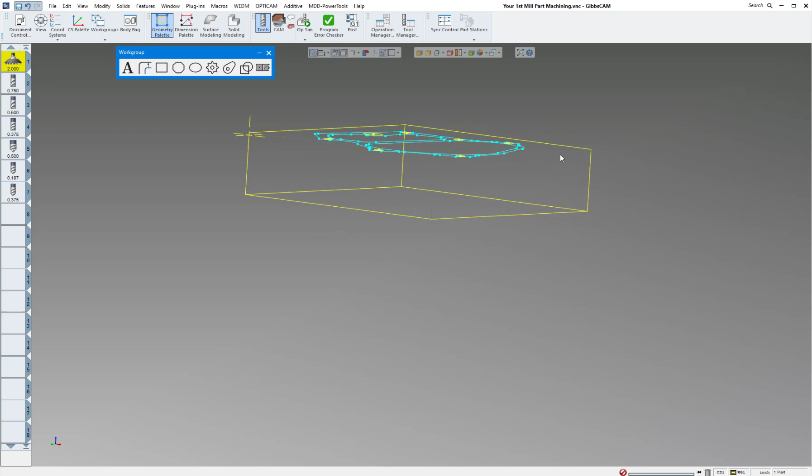Here's our part that we drew on the previous video. You can see everything is at top Z0, and the last thing we did last time was move our origin over to the top left corner, as you can see.

Okay, so now we need to machine it. I want to pocket all this material out before we do some of the inside. We just turn off the show stock and origin there.

So we need to make what they call an air wall, because we're going to use high-speed volume mill to cut that. I'm going to bring up my geometry palette right here, and click on shape and square or box.

We know our stock size from before was 4 3/4 by 4 3/4, because we moved our origin to the top left corner. So I'm going to type in 4 3/4 and 4 3/4.

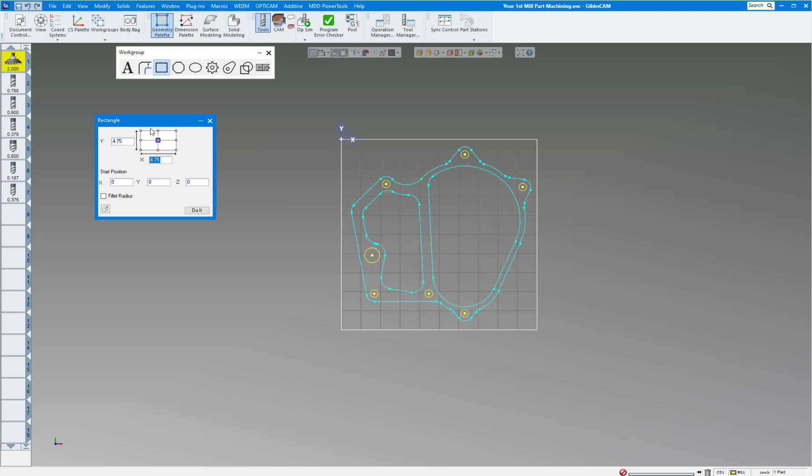Now make sure you pick where you have the origin. You don't want to pick here, because this is what you'll end up with, which you don't want. So make sure you tell it where the origin is, in the top left corner. Click do it, and you have a box the same size as your stock.

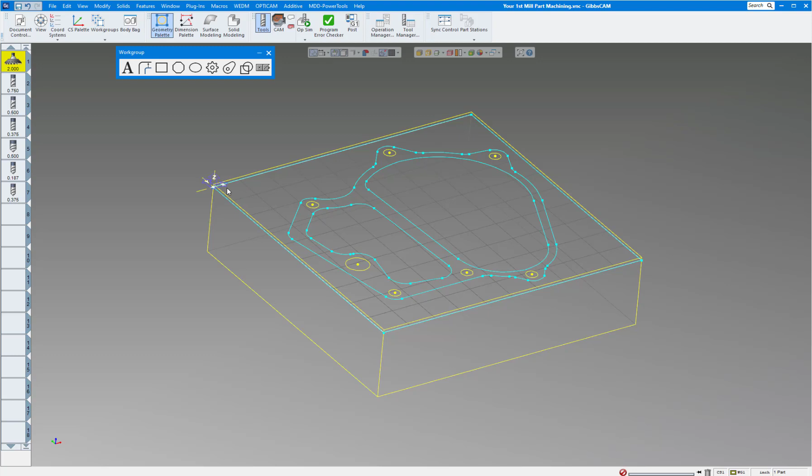So we need to allow Gibbs to bring the end mill past this stock. If we leave it as a wall like it is now, the end mill will stop at the edges and the corners, so it'll never clean this out. So we have to tell Gibbs that we can go outside this stock here to clean all this up.

I'm going to just double click on the shape, and go up to modify and click on toggle wall air. When you do that, your geometry will be red, telling Gibbs that it can go outside the wall as needed in order to clean this up.

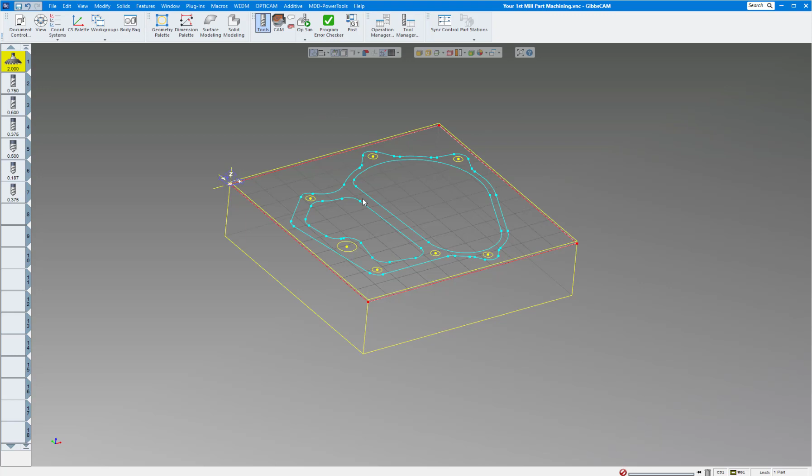So now we need to pick our tools. I'm going to go through each one of these tools, so you can stop the video if you like and take pictures of it so you can create the tools.

Here's my first tool, face mill. You can see everything I have filled out there, and I also call it face mill in the comments. The reason I do that is you can hover your mouse over here and it'll bring up the comments for each of the tools. So that was my first one.

Now the second one is 3/4 inch rough end mill. You can see the values there. Tool holder, call it. Next one, 1/2 inch rough end mill, basically the same, call it.

Next is a 3/8 end mill, because remember we have to go around the outside of this, and this is a 190 fillet, which means we have to use a 3/8 or smaller end mill to finish. We could use anything we want to rough it, but to finish it, if we want to be to print, we have to be about a 3/8 end mill.

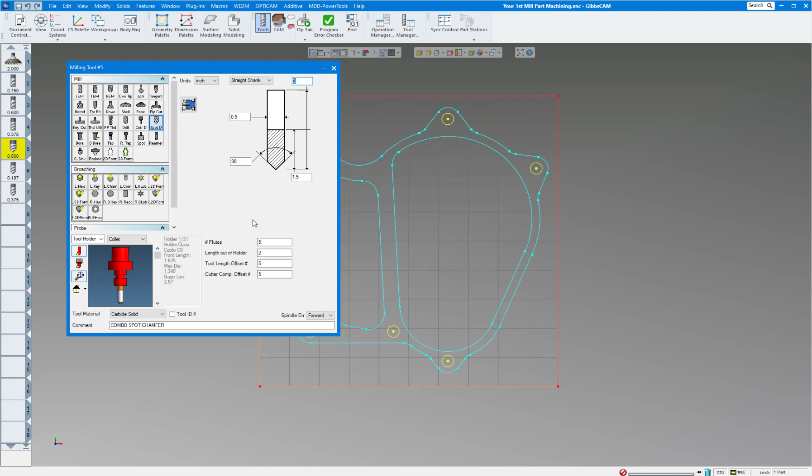Next tool is going to be a spot drill. Nowadays there are combination spot drills, chamfer tools, so that's what I call this, and that's what it's going to be. It's a 90-degree angle, which means it'll put a 45-degree chamfer around the part, with multiple flutes.

And this one is going to be a 3/16 drill, or 187. Notice with the new version 14 you have a drop-down menu that you can use numbered drills or letter drills now, without having to look at the chart.

We're not running in millimeters, that'd be much easier. Okay, and our last tool, 3/8 drill.

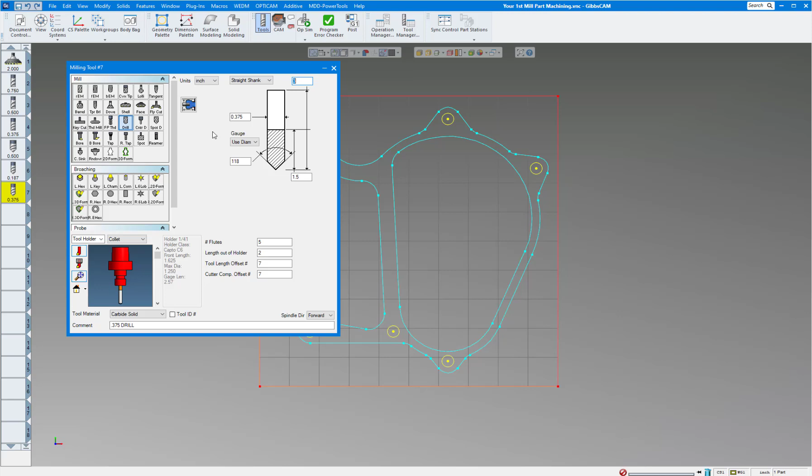So hopefully everyone has a screenshot of that.

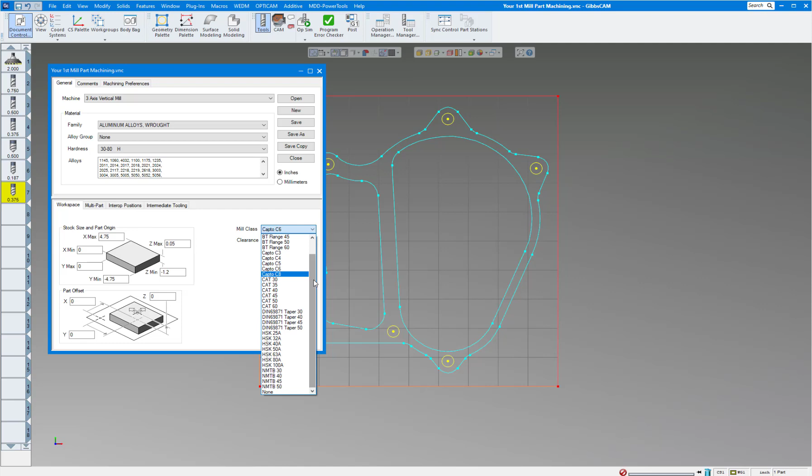So as in the last, we're going to leave 50 thou of stock, which would mean it's a -1.2 overall thickness, because our part's 1 inch thick, and I have a 200 thou clearance. Of course, this needs to be a Cat 40.

Okay, so now we're ready to start machining it. I'm going to bring up my cam palette, just click on a blank screen there. So the first thing I'm going to do is face mill it off. I'm going to bring up a face mill, so this is a roughing process here, right here, roughing.

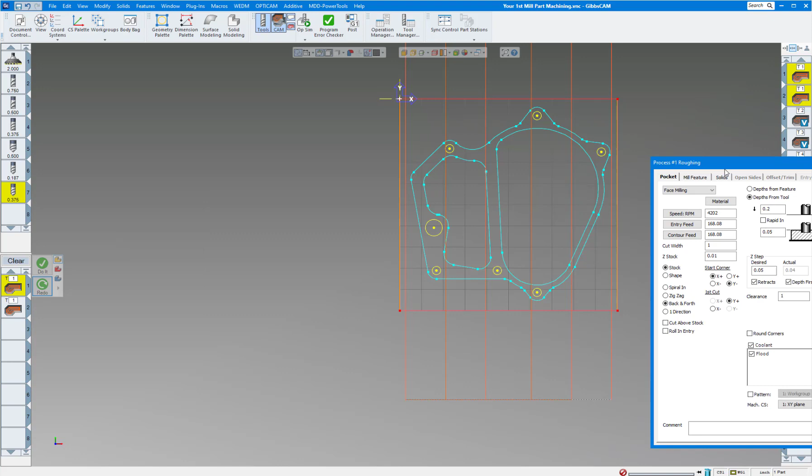And when you do that, it's going to ask you, if you pick roughing, what tool you would like to use. Or you can do it the old way and drag a tool down on top of there. So either way will work. So I'm going to do multiple processes here. So the first process, I'm going to click on face milling.

You can see you have offset, zigzag, offset, cleanup, and face mill. So we're going to choose face mill. I'm rapiding to 200 thou above our part. Remember, there's 50 thou of stock left on the face, and I'm going to machine it down to Z0.

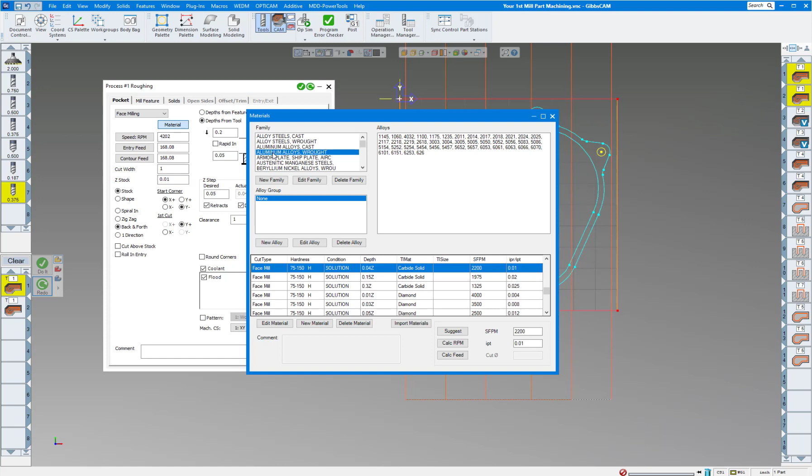Now on here, I'm going to actually leave 10 thou stock on the Z, cut width about 1 inch, and you can either update your speeds and feeds with the material you're cutting, or let Gibbs figure that out by the material you chose here. You can always edit this database to what you like.

And I can do it either by stock or by shape. If you click shape, then it wants you to click on a shape to cut. We're just going to do stock, and it'll clean up the rest of this face here.

Now I always think about where it's going to throw the chips on the first cut. So if you have it going from, say, the left side forward, it's going to throw these chips right at you, right through the door, as you're the operator. So if you have the door open by chance, then that wouldn't be good. So we want to keep the chips thrown to the back. So you can choose the corner you want and the first move you'd like to make.

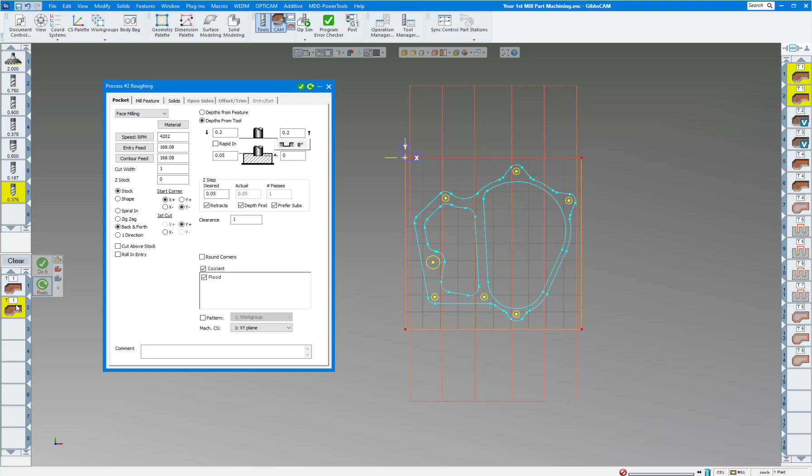Now the clearance is how far do you want the face mill or cutter to move off your part before it switches over to go the other direction. And I just chose 1 inch there. So everything looks good there. Now the second process, basically the same thing, but I'm not leaving any stock here. So about the same thing.

If I click on redo, or do it in your case if you're starting out with new, this is the toolpath you're going to get there. Now we could either render now or wait till we're done, but sometimes I like to render in between. So if you bring up your Operation Sim, don't click on Machine Sim unless you have a Machine Sim to go with it. Click on Op Sim. So if you click on Op Sim, rewind and play.

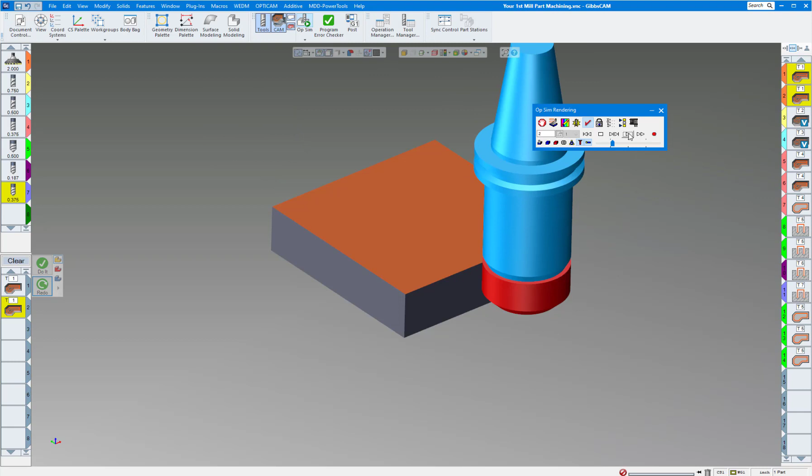Slow it down a little bit. You can see facing that off, then taking the finish pass. So now we're down to Z0. Okay, so the next operation, I'm just going to clear these out. The next operation is going to use high-speed VoluMill as well, but this time we're going to take out all the material out here.

Now if you don't like this annoying toolpath showing up here, it's because these are still yellow. So if you want, you can just click an empty space and just zoom up or zoom down. That'll go away. So the next process I'm going to do is going to be a VoluMill process right here. So click on that and it'll ask you the tool that you would like to use. In this case, tool number 2, 3/4 inch end mill.

So I can use my Technology Expert, which works fantastic. You can tell it what you're cutting, the taper, the maximum RPM of your machine, the max feed rate, depending on your machine. I usually put about 1,000 or maybe faster. And how are you holding the workpiece? Very rigid, loose, or kind of in between?

And how aggressive do you want to be with the cut? If you want to get real aggressive, you can put that over there, but this is pretty good. I usually start about here or less to start out with, make sure everything's okay. And how are you holding the end mill?

Most of the time, if you're doing high-speed milling, large depth, you want to use either milling chuck, hydraulic milling chuck, or shrink fit. I find with ER collets, it'll pull the tool out of the collet pretty easy when you get aggressive. So I would choose one of these last 3 here. So if you do hydraulic chuck, that's fine.

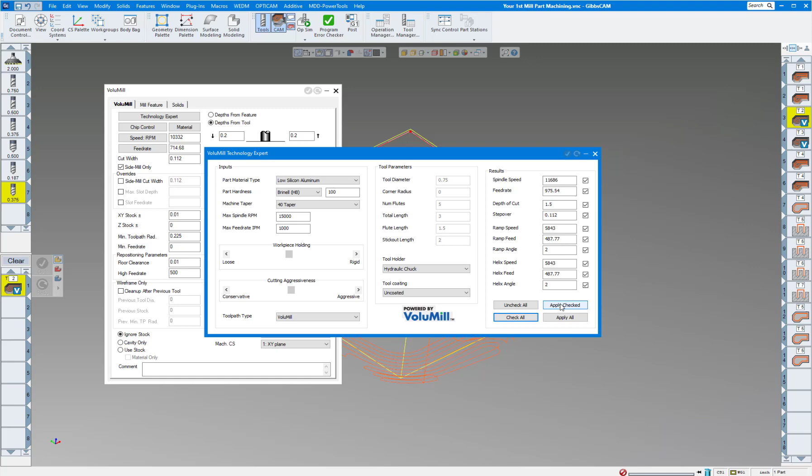And now you can say uncheck all, check all, or if I did check all, you can click on apply all or apply checked, and it'll fill in the blanks for you here for your speeds and feeds, which looks pretty good.

Okay, we're rapiding to point 2. We've already faced the material off, so that would be Z0 now. Again, point 2, and we want to go minus 1.050. Our part's an inch thick. I'm just going to go down a little bit deeper than that.

And usually with high-speed milling, most of the time you don't do it in steps if you can help it. I'm just going to put 1.5 inches, but it'll round it off to 1.05, which is basically the full depth. I'm going to leave XY stock. VoluMill is just roughing only. It is not made to finish.

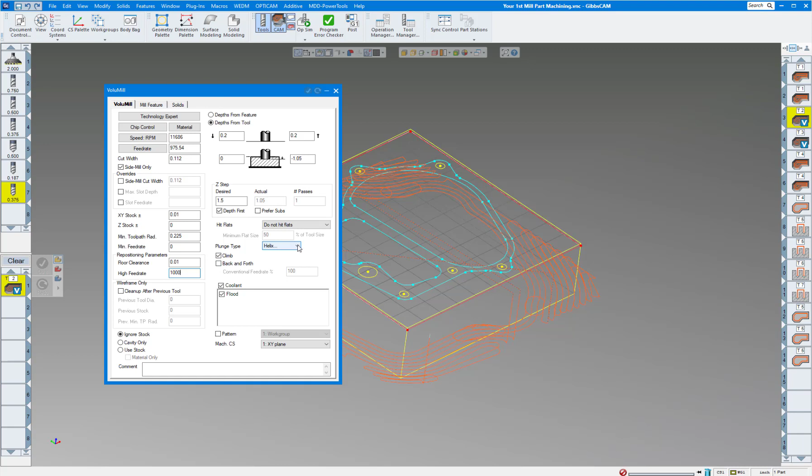And minimum tool path, I put this here. Well, that's kind of a default, but the smaller you put this, the farther it'll get into corners. Okay. Repositioning parameters, that means after it cuts and goes to do the next move, it's going to move up to 10 thou, and then high feed rate, I'm just going to put 1000, because VoluMill does not use any G0s, because G0s are unpredictable. It'll write it as a G1 move, so it knows exactly where it's going to go. And we're going to plunge type helix there, which looks good.

So okay, here let me just choose an empty screen there so you can see what I'm clicking on. So click on your box. You can either single or double click, it doesn't matter. It's already chained up, so Gibbs knows. Hold down the control key and select one of the edges on your part, or you can double click that as well. Either way will work.

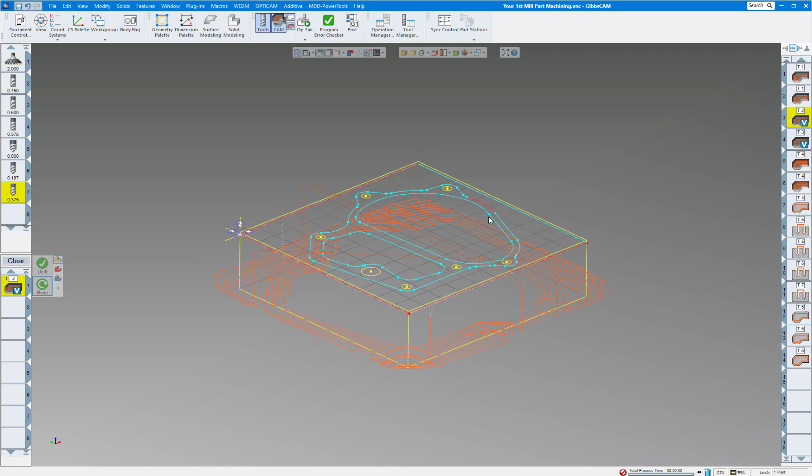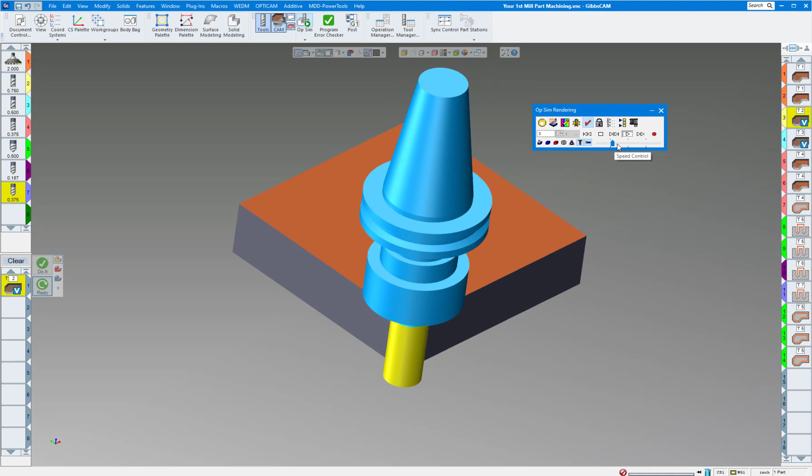So I'm going to click there, and I'm going to actually click on redo since I already have an operation there. And it takes a few seconds, and you'll see there's the toolpath, really nice and efficient, cuts that out really good. So let's go to the rendering on that. So we're going to face it off. Again, finish, and then the next step is to rough this part out. And I told it to side mill cut only and to conventional mill. Okay, so that roughed all this out and left stock on the island there. Okay, we'll clear this out.

The next operation you want to do or process will be another volume mill process to do both these cavities. So in this case, I would just double click here, choose volume mill, and this time we're going to use tool number 3, which is the 1/2 inch end mill. Okay, it's going to fill in the blanks there. Let me bring this back up here since I already have it done.

Again, point 2, our part is 3/4 thick, our cavity. Again, using volume mill, fill in the blanks there. Can leave some stock there on the XY and some Z stock as well. And again, we'll put this up to 1000. And again, we're going to do a helix, and this time you can select both pockets. And I'm going to click do it. In my case, redo, since I already have an operation over there, and there is our pocket.

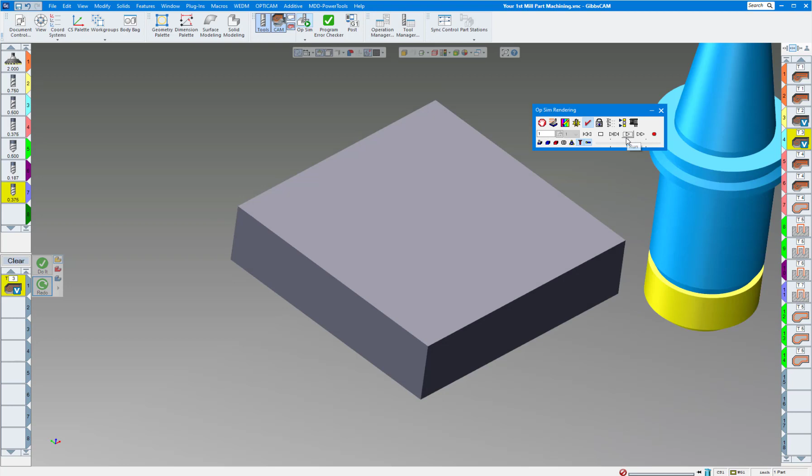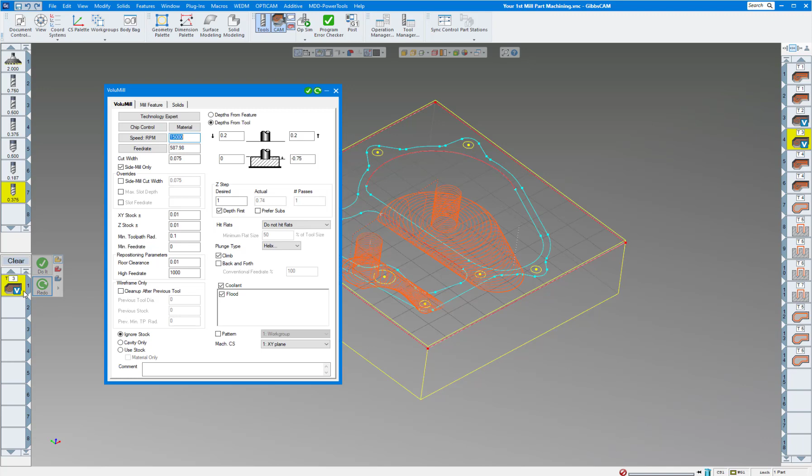So if we were to render this now, we'll go up to that point, slow it down a bit, and it's automatically going to helix down into our cavity. Okay, now this one I wanted to go in a little bit closer to some of the corners there, so on the minimum toolpath radius I put 100 thou in there, and that'll get it a little bit farther into the corners there for me.

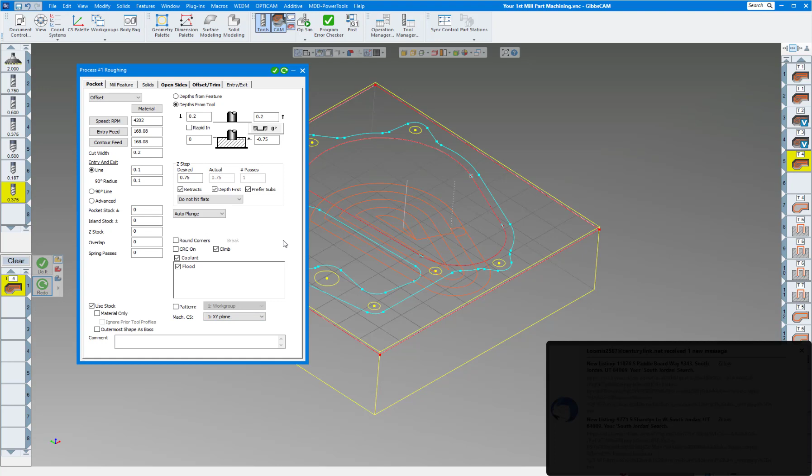Okay, the next operation is going to be to finish these pockets. So we're going to go under the floor and finish these pockets. Actually, I could do both at the same time, so I'm just going to delete that other one. So here we're going to go tool number 4, 3/8 end mill. I'm going to go right to 3/4 of an inch, and even though I chose a roughing process right here, just because it's a roughing process does not mean you can't use it to finish. So I want to actually finish the floor as well as the sides.

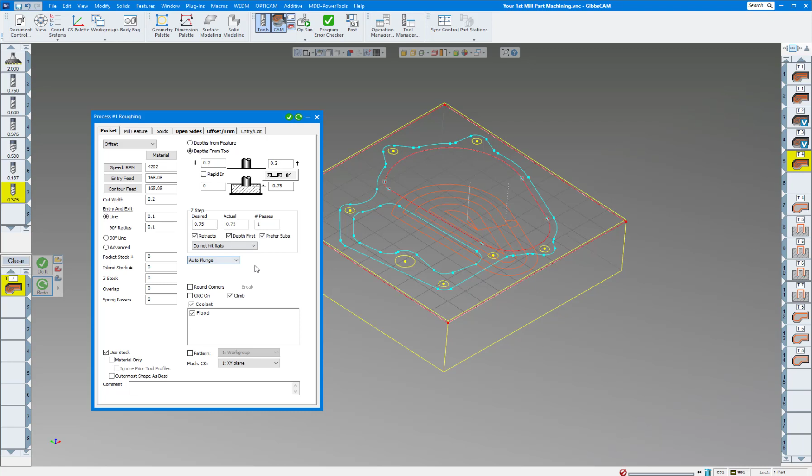So I'm going to go 3/4 deep. Cut width 0.2 is fine. When it gets to the edge of the walls, it's going to enter and exit at 100 thou radius. These don't need to be the same. They can be bigger or smaller. I'm going to climb mill. Everything else looks good here.

So again, I'm going to click on this cavity, hold control key down, select that cavity, and of course you'll click do it. In my case, I'll just click redo, and that finishes the inside cavities. So let's go to that point. We'll just speed it forward here.

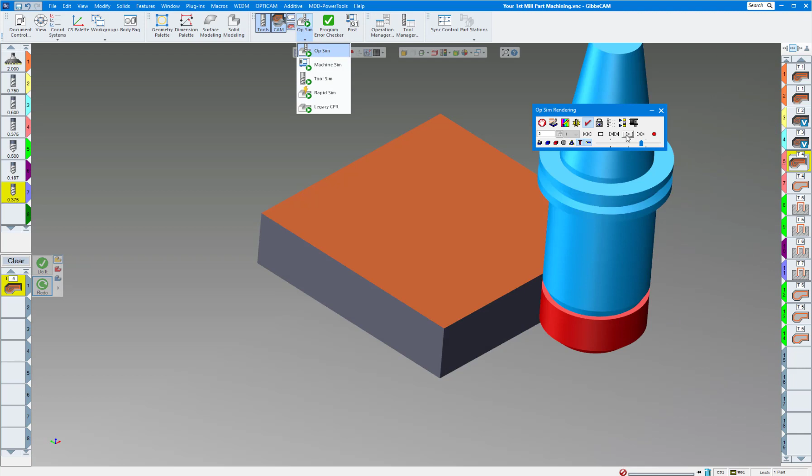And there we finished. Okay. Now it went to the outside again because I told it just to use that tool and render everything there. So the next operation, operation number 7, is going to finish the outside. Now in this case, it's a 3/8 end mill going an inch deep. It's getting a little long. I'm afraid it might vibrate, so I'm going to do basically a helix down. If I go to side view, you can see that.

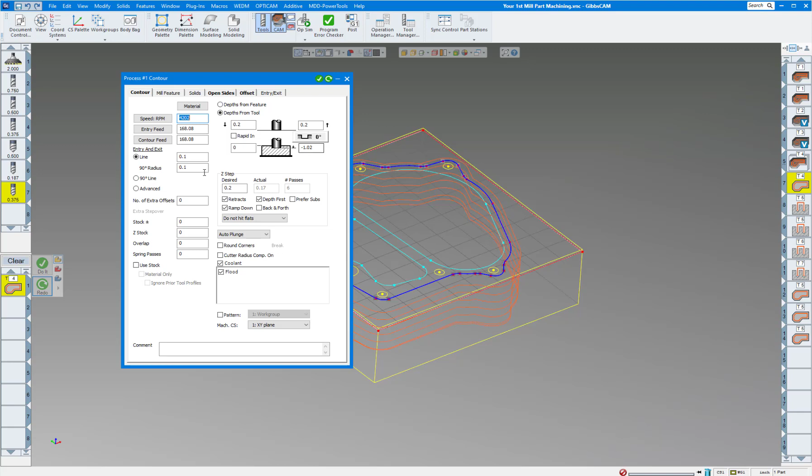So I'm going to bring up this operation, which is a contour with tool number 4, the 3/8. Again, choose your RPM and feed rate. We're going to go down to -1 inch because the outside is 1 inch deep. I'm going to go about 20 thou deeper than that. Again, I do an entry and exit there. And desired step, that means 200 thou. That means every time it goes clear around the part, it's going to go 200 thou deep because I have ramp down on there. So it's going to do a helical move around the part.

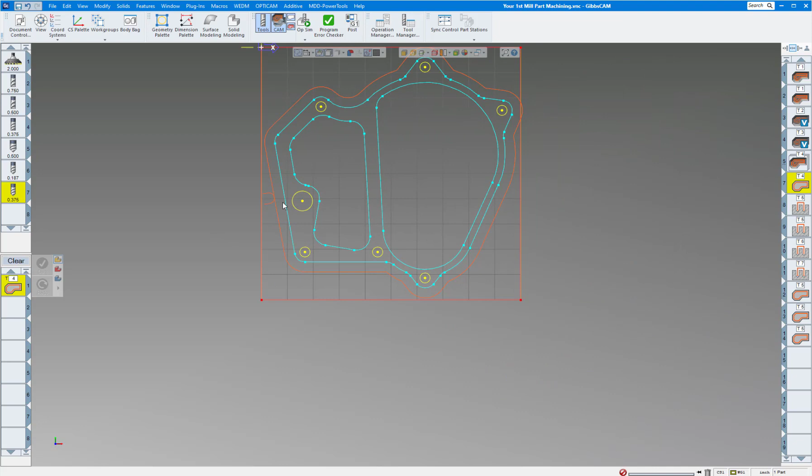I'm leaving no stock. And from here, you can choose whichever side you would like to start on. I'm going to start there, climb mill, so you want to choose the outside circle there. If you wanted to start off your part, you could easily drag this off here, and you can see it starting off the part there. If you wanted to finish on there, you could do that as well. You can see you can start and end at different points. If you wanted to, redo that.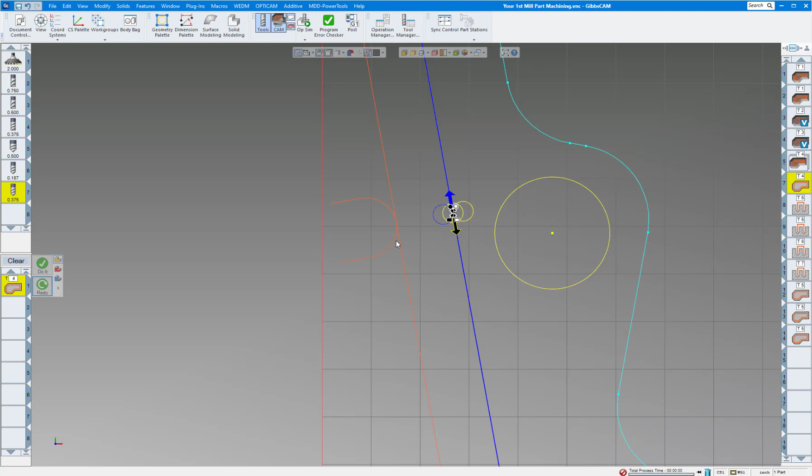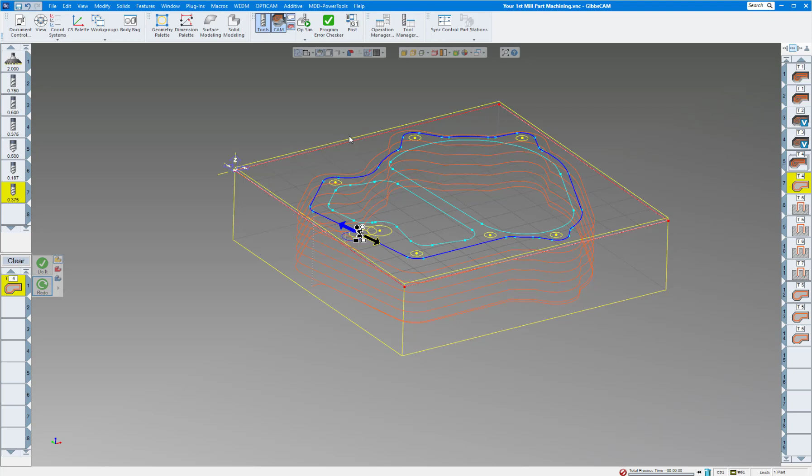If you want to do an overlap so you don't have it enter and exit at the same point, because you might have a little witness mark there, you could open that process and you could say overlap by 1/2 inch. Click redo. You can see now it's spaced out a little bit more. So a nice way to cut that. Now when it gets to the very bottom, it's going to stay on the floor one more time around so you don't have a ramp at the bottom. So if we render again,

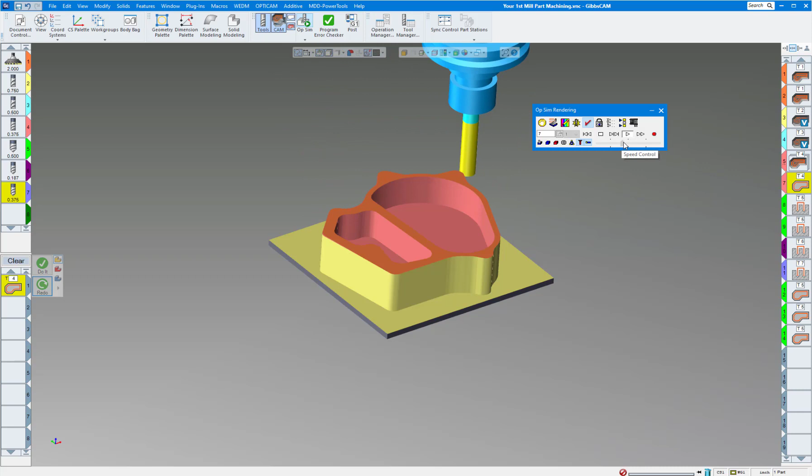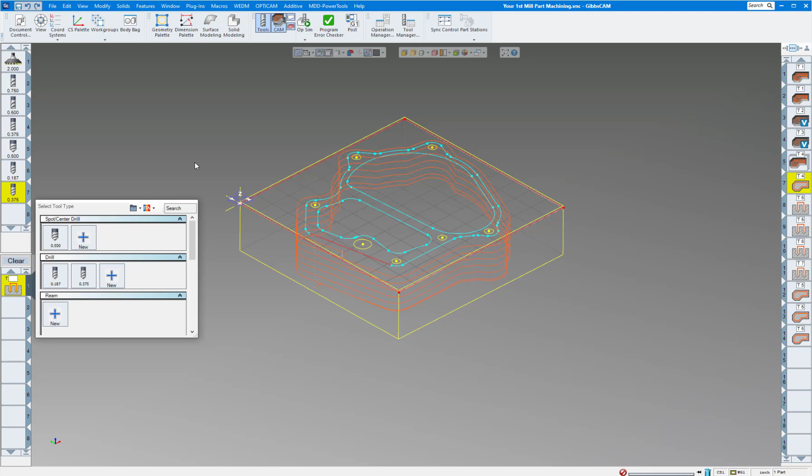okay, we'll slow this down a bit for the finish. There, it's finishing that cavity, and then it's going in, and as you can see, it's ramping down the part. Okay, so that's finished there. The inside cavities, outside cavities, all looks pretty good. Now the rest of this would be to do the holes. So let's clear that, bring up another process. This time it's going to be holes. Okay, and we need a spot drill and then we need a drill.

So our process is going to be first tool number 5, which is our combo spot drill and chamfer tool. Again, point 2. If we look at our print that we did before, you will see it has a chamfer on there. Well, this is a 187 holes through here, but the print, I believe, says 20 thou chamfers on everything, so that'd be 20 thou on each side. So if I type in this little symbol here, you'll see it says diameter. First you have to tell it where the surface is you're cutting, which is 0. And here I'm just going to type in and let it do the math. So 0.187 is our drill size plus 40 thou makes it 227.

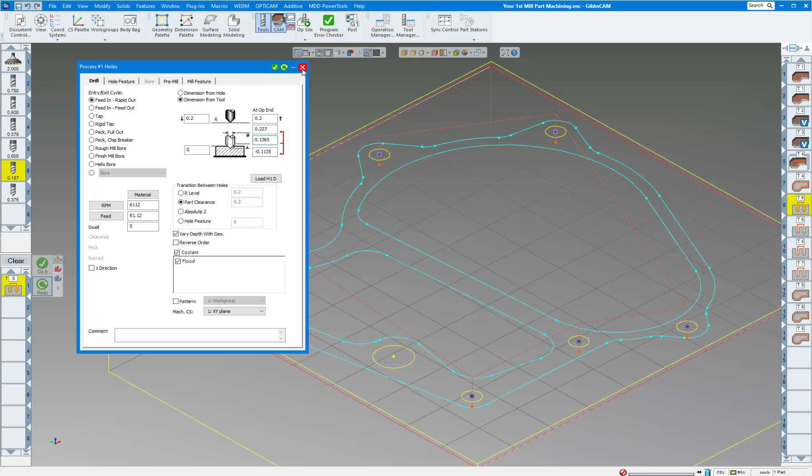So then Gibbs will calculate where the sharp corner is of the drill and the depth. Now this will change depending on the angle of your drill. In this case, I have a 118 drill angle. You could use a 135 or whatever you have on hand, and this will update this as well. So click on there, and I'm going to select each one of these. Now Gibbs doesn't care whether you select the point or a hole. Either one will work fine. Just don't select both of them, otherwise it'll spot drill it twice. And you click on do it, and you'll see it spot drills a hole.

Now this is a 3/8 one, so it has to be separate. We want to do a little bit bigger chamfer there. So the next process is going to be the same tool, a chamfer tool, but this time this is a 3/8, so I'm going to type in 0.375 plus 0.040, 415. Okay, so this one I'm just going to click on here and click on do it, and you'll see that it spot drills those. So let's just quickly render this.

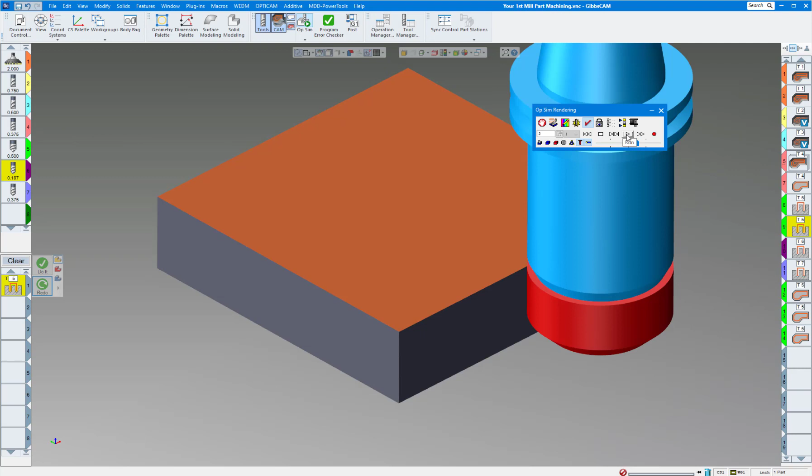Okay, finished. So there's the spot. It spotted everything exactly how we need it. Now the next process operation we're going to do, clear this out, is going to be...

The 187 holes. So I'm going to choose the 187, material 0. I want to make sure the edge of the drill gets clear through our part. Remember, our part's an inch thick, so I'm going to say -1, and I'll give it about 30 thou, so it's going to go 1.030. The tip of the drill is going to be -1.086. Of course, you'll do your RPM and feed, and whether you want to feed in, rapid out.

Normally, if you're doing high-speed drilling with high-pressure coolant, 1000 psi, you no longer need to peck anymore. It's feed in, rapid out, the chips will blow out. If you don't have through spindle coolant, you may want to do a peck full out or a peck chip break. It's up to you.

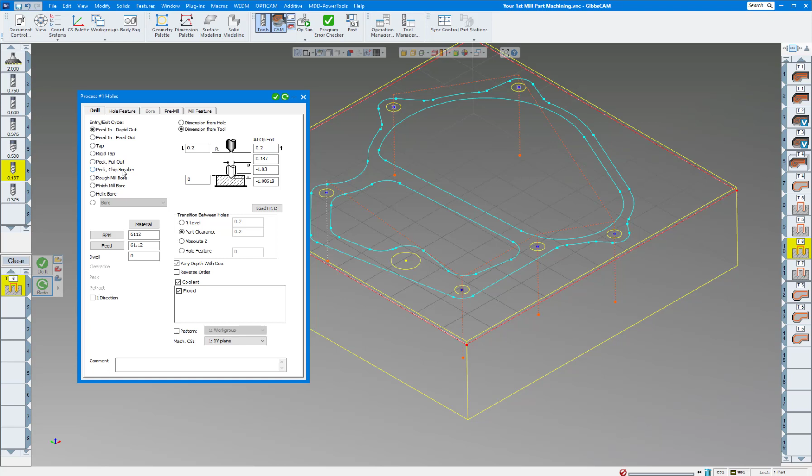So we'll do that one. Just redo that one. Now next is tool number 7, which is the 3/8 drill. Same scenario here, just going to do that hole. So make sure you only select what you're going to cut. Don't leave these all selected, or you're going to end up drilling all of them.

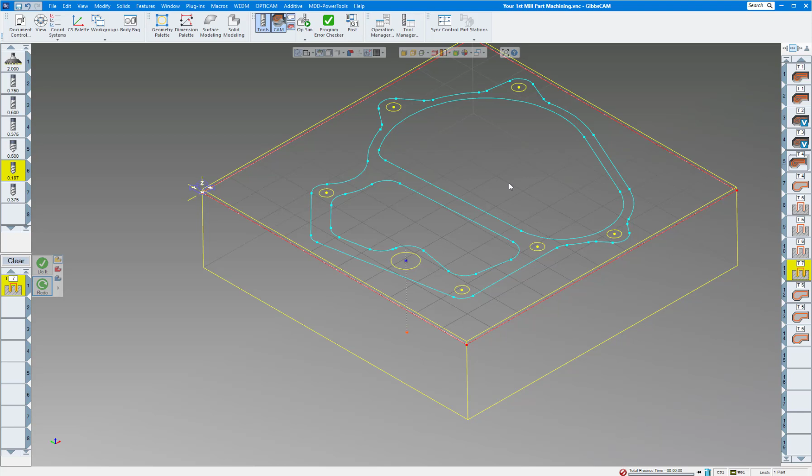Okay, then we want to do some chamfers here. So tool number 5, this was the combo chamfer and drill. I'm going to go down now. If you know your trig here, 90 degrees and 1/2 inch, that means you only have a 1/4 inch to play with before you're up on the straight side. So I can't go more than a 1/4 inch. I don't want to go not very deep, otherwise you start cutting with the tip and the finish does not look very good. So I'm going to go -0.2.

All right, that's fine, and we need a 20 thou chamfer. So I'm going to put -20 thou in here. Now notice this says stock plus or minus. Anytime you leave positive stock, it leaves material. Doesn't matter whether you're cutting ID or OD, it leaves material, but I want to force it into the material by 20 thou, so I'm going to put -20 thou. Make sure you uncheck ramp, otherwise it's going to ramp down, and you'll click on do it.

And there this one is. Make sure you choose, of course, this side you want to cut on, and if you want to climb mill or conventional, that's up to you. Most of the time, 99% of the time, you want to climb mill on a CNC.

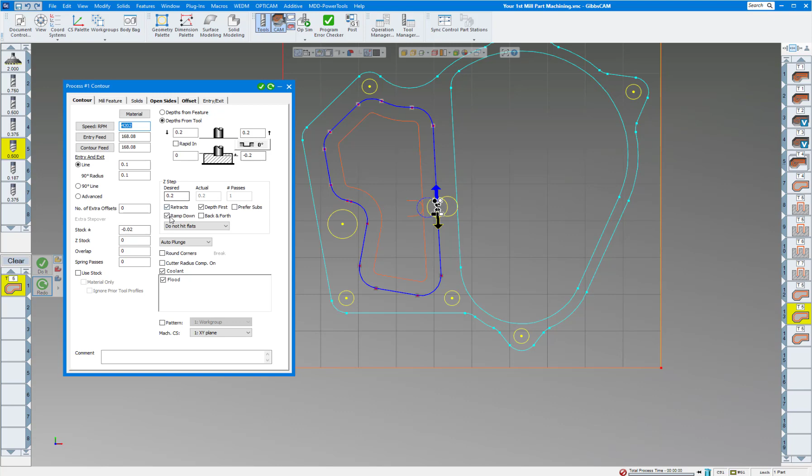Okay, the next operation, we're going to do the left pocket. Same scenario here. Let me uncheck ramp down, and you'll click on do it, and there's that one.

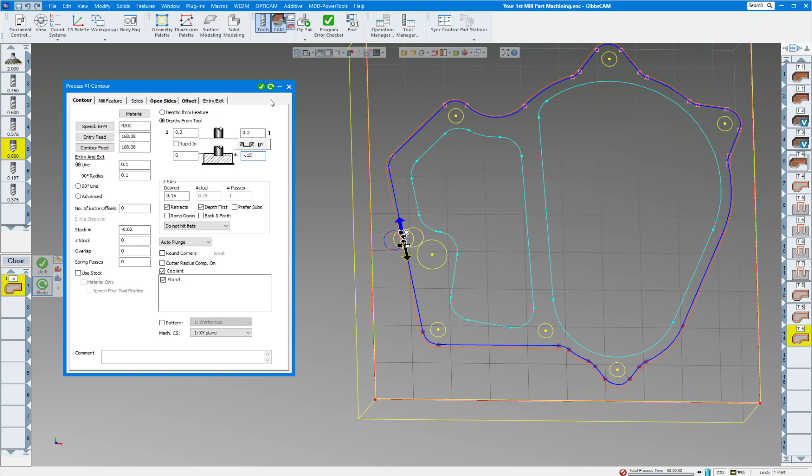And the last one is the chamfer on the outside. Again, -20 thou, and I should probably put, we're going to go -150 there, because we have kind of sharp corners there, and if you go too deep, then it leaves a larger chamfer on there, which is undesirable. So I'll just click on redo, and there you have your part finished.

Let's run through the whole thing. I'm going to uncheck this box. This will just let it run through everything.

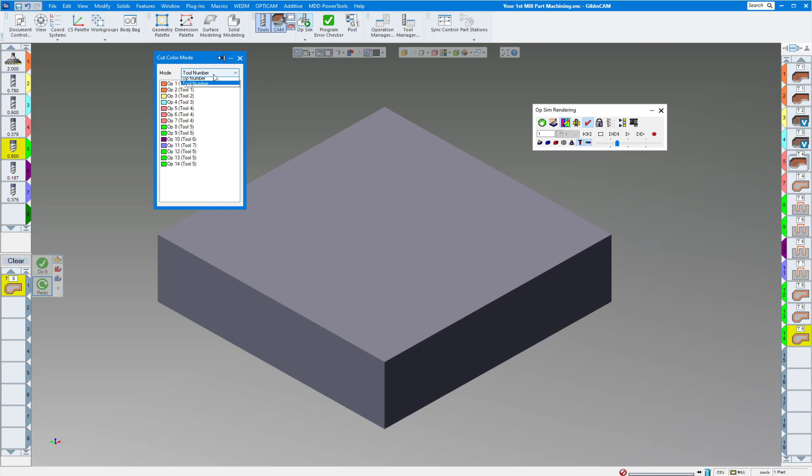And one thing we want to do here is I always turn on colors. As you can see, you can do it by tool number. If you do Gibbs colors, it's going to leave everything blank, and you're not going to know what tool is cutting what. This is just going to show it all as gray. If that's how you like it, that's fine. But I like to show colors, so you can do it by op number or tool number. Normally it's tool number. And if you don't like these colors, you can just double click and change it to whatever color you'd like.

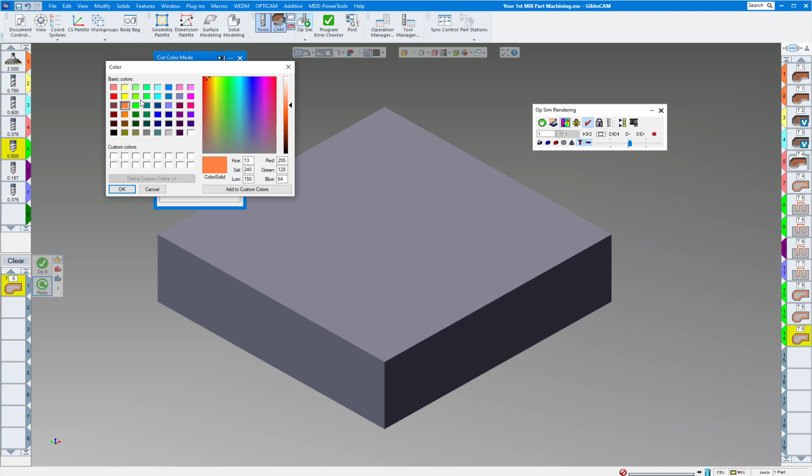So let's rewind and play. And there's my facing. There's my roughing. We'll speed that up a little bit. And the pockets. And we'll slow it down a little bit there.

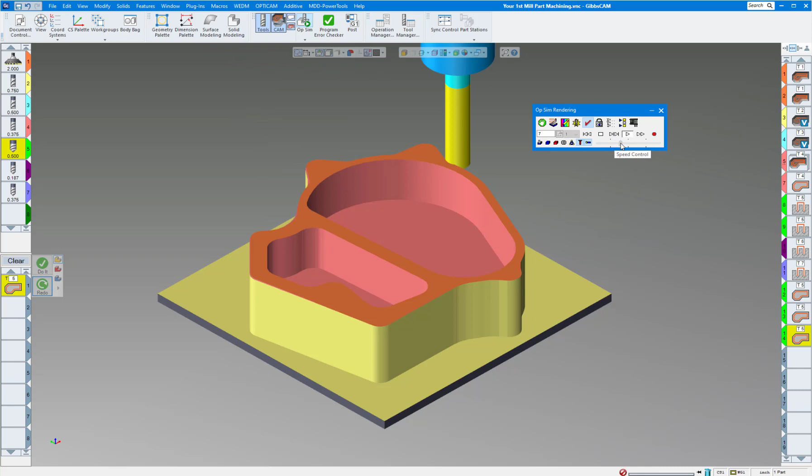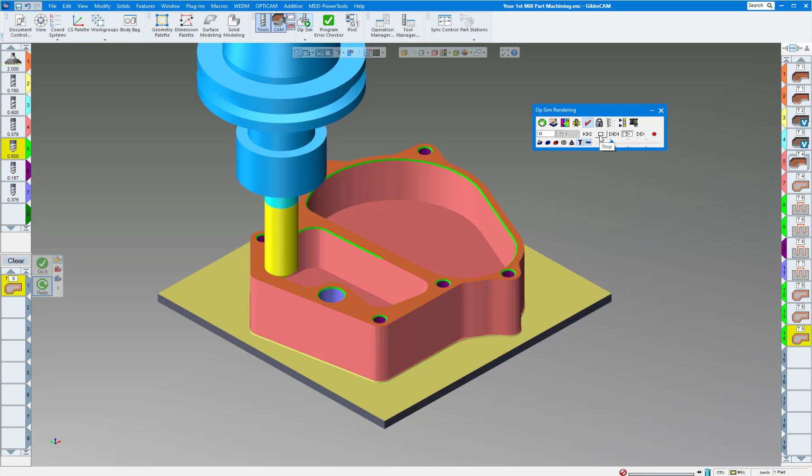Okay, now we're going to slow it down and do the spot drills, then the 187 drills, and the 3/8 drill. Now we're going to chamfer the outside.

And it looks really good. Now the only thing we may want to add might be the vise to hold onto this, so let's finish off using a vise.

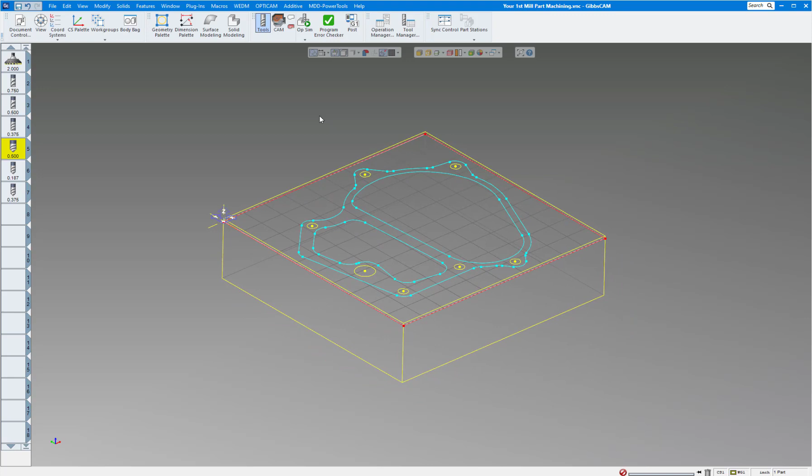So I'm going to turn off cam. Anytime I bring in geometry or solids or anything like that, I always turn the cam off so I don't accidentally delete something over here. I'm going to bring in my solid model by going to File and Import.

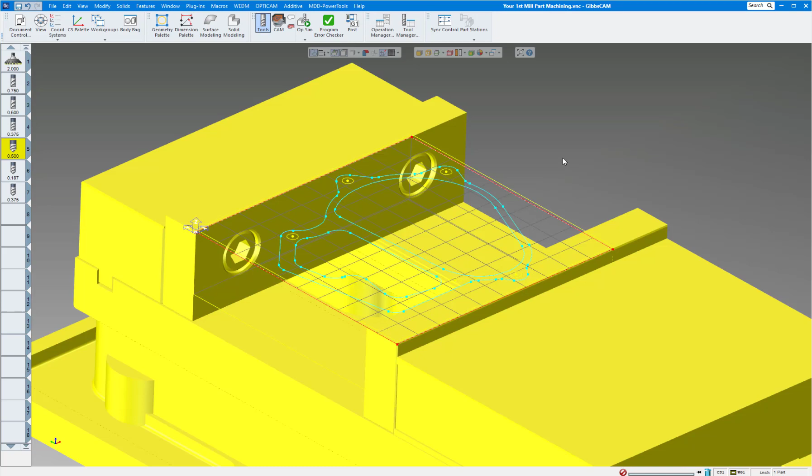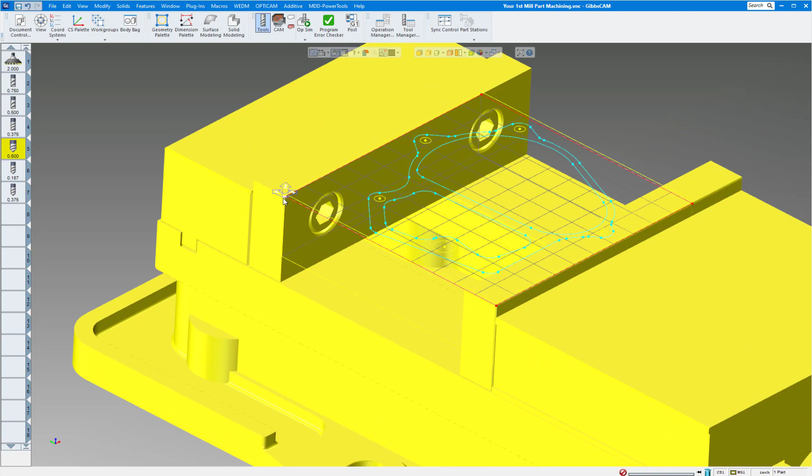I'm going to click on the Kurt D675 Vise Simplified, and it's going to bring in my vise. When I created this vise—you can download this from Kurt or any of the other manufacturers—I put the origin on my vise over the top left corner, because anytime you bring in a solid model with Gibbs, it matches where the origin is on your solid model to the origin on your part. That's why it looks like it's right there on the corner, because it is.

I'm going to go to top view. You can see it's not quite centered, and that's intentional because this is where the coordinate system is on my part and my vise. I want to move this kind of to the left, but first we want to make this vise a fixture. If I click in space, it unselects the vise, and you can see this comes in the color I chose when I set up my screen.

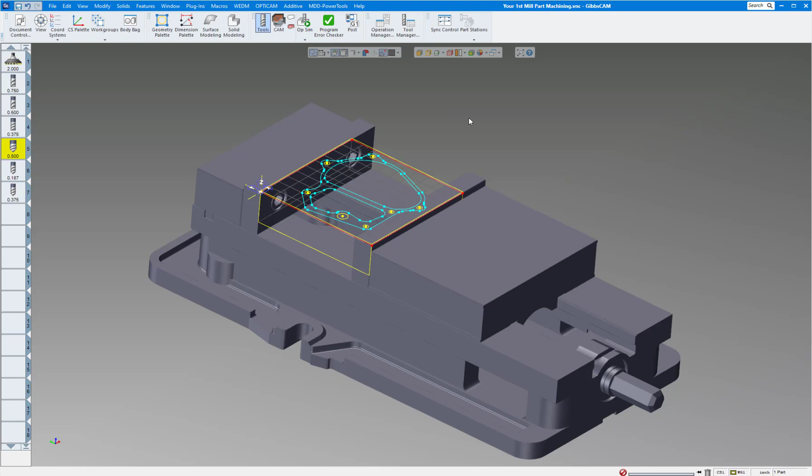But we want to make this a fixture, so I'm going to make sure face selection is off, hold the control key down, select the vise and the rear jaws. While I'm there, right click, go to show properties of selected. It's going to show everything I selected there, and I'm going to change it to fixture display only and put chord height 10 thou.

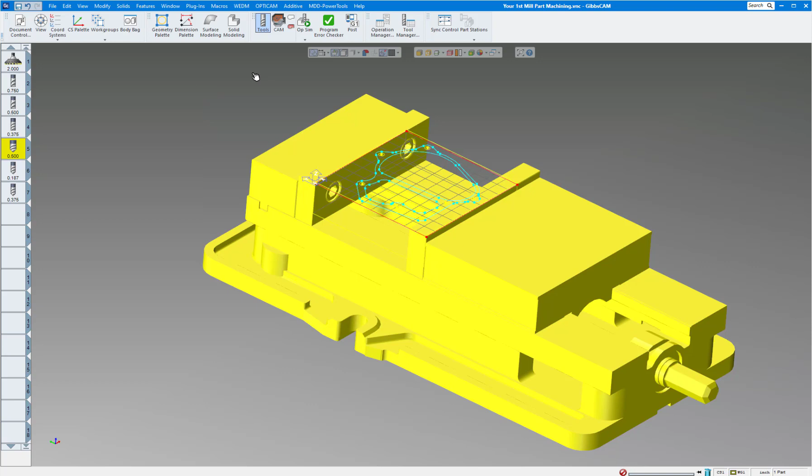Now the reason it's fixture display only is I want to have Gibbs render it as a fixture—that's why it says display only—but it's not going to care if I cut into the part. It won't give me a warning, and it'll allow me to create a toolpath, because sometimes you want to cut into the vise to make soft jaws. But if you click on fixture, the tools will avoid the vise and stay away from it. I'm just going to do fixture display only, click apply to all, click in space—the default color is red unless you change it.

So I need to move things around just a little bit. I'll click the vise here, go to modify and translate. I'm going to move the X over probably half an inch. Let's see if that looks good there. Yeah, that looks pretty good. You can always extract the geometry off the vise if you want to get it perfectly exact.

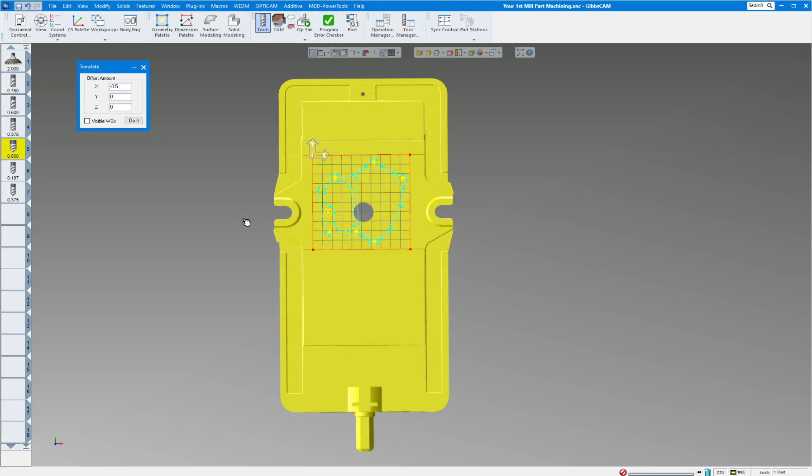Now, as you can see, if I render this—let's just render that and you'll see what's going to happen. Let's speed it up. As you can see, of course, it's cutting into our part. Doesn't look too good, so I need to make sure I move my vise down. I'm just going to go to a sideways view here.

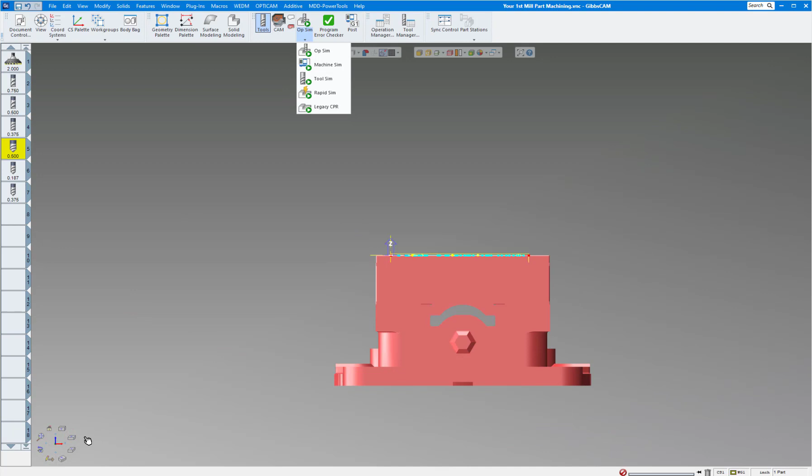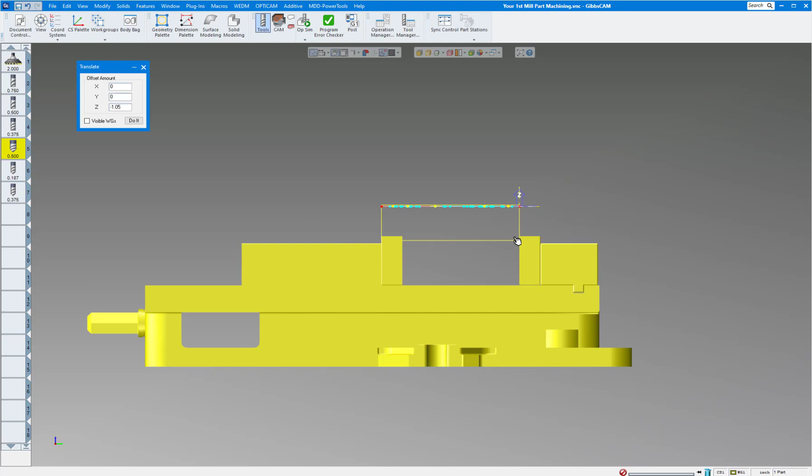Now I'm just going to adjust the rear jaw. I'm just going to guess on this—maybe a little bit more. Okay, that's pretty close. Like I say, if you want to get exact, you could extract the geometry off there and put it right on the money.

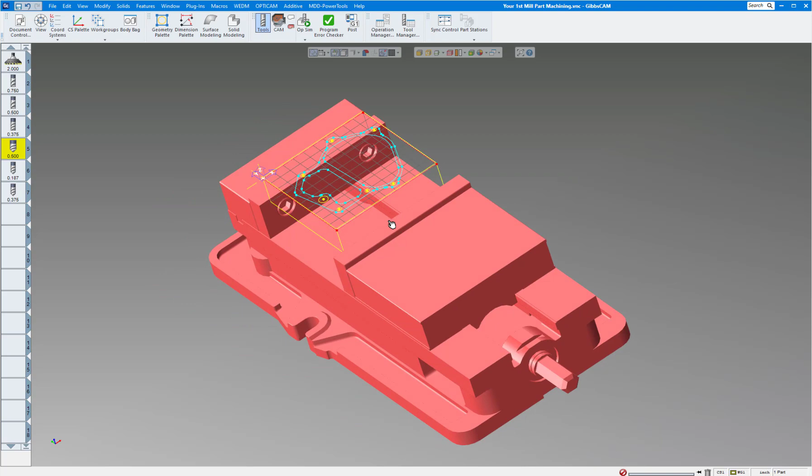Now, if I render, you can see everything looks pretty good there. So that is how you machine your very first part in GibbsCAM.

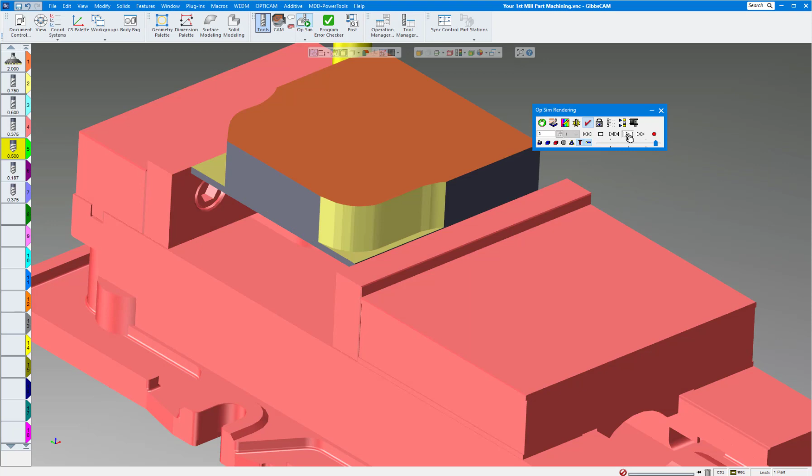Of course, you can change the rendering, how you want to see it, by right-clicking up here, going to settings, and say I want it just fast. Click apply, and when you render, it'll even go full speed—even faster. But it looks a little chunky, as you can see there. Okay, it's just made to go fast.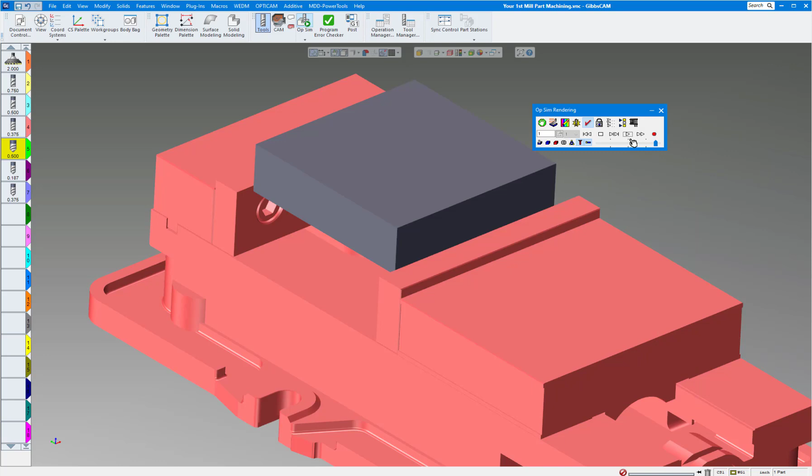If you click on that setting, you can click accurate or custom. The posted code is going to be exact either way you choose, but if you want to see a smoother part, you can click apply. You can always have it beep or stop if it encounters a crash, and you can see this looks pretty good there.

So that's your first mill part. Hope you learned something here. Thanks again for watching.